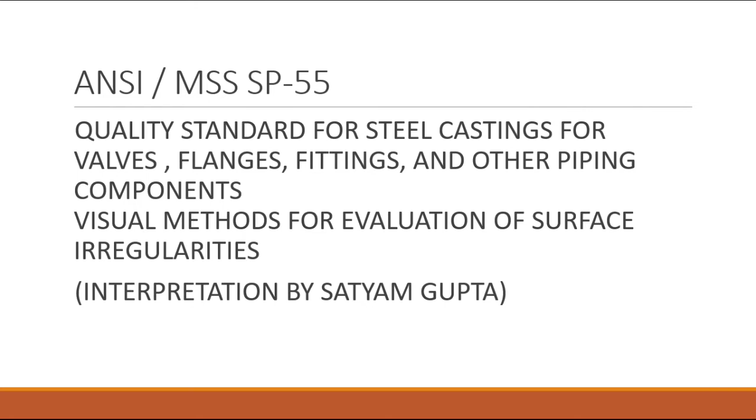Now I am moving to my technical topic, which is MSS SP 55 - ANSI MSS SP 55, quality standard for steel castings for valves, flanges, fittings and other piping components, visual methods for evaluation of surface irregularities. Interpretation by Satyam Gupta. Clause number 2.0: surface quality by visual inspection.

Clause number 2.1: 12 general types of surface irregularities are characterized in the collection, with 5 examples included for each type. The 2 examples shown on the left illustrate an acceptable degree of that particular type of irregularity. The 3 examples on the right are categorized as containing unacceptable defects. Clause number 2.2: the size of the plate is intended for general use for any 4-inch by 5-inch area.

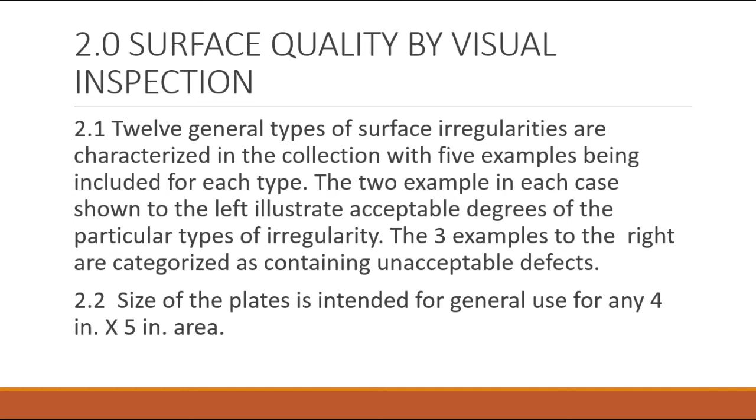Reference photographs, clause number 3.0. So friends, as I told you in clause 2.1, in MSS SP 55 for castings we have 12 different types of defects, and each defect type has 5 examples. Out of these 5 examples, we can accept the 2 examples shown on the left side, while the 3 examples shown on the right side cannot be accepted.

As per clause number 3.1, a set of 60 reference photographs illustrating various casting surface irregularities which can be observed by visual inspection is included herein. These photographs are actual-size examples of gradation involving acceptable and non-acceptable irregularities. It is intended that irregularities less pronounced than those shown as non-acceptable shall be accepted under this guide.

Clause number 5.0, comparison of MSS SP 55 acceptance criteria with CTI comparator covering surface texture quality standard. CTI is an institute called Castings Technology International, situated in Europe. This institute created SCRATA plates which are directly comparable with casting, and based on these Scatra plates we can accept or reject as per this specification. In further clauses you can see how we compare the Scatra plates with casting and how we accept or reject it.

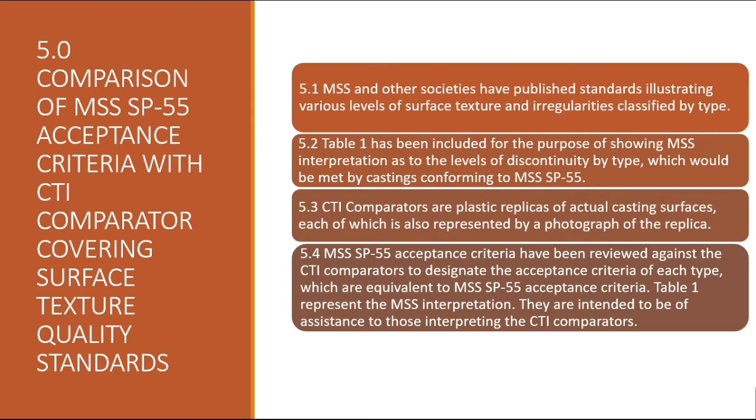Clause 5.4: MSS SP 55 acceptance criteria have been reviewed against the CTI comparator to designate the acceptance criteria of each type which are equivalent to MSS SP 55 acceptance criteria. Table 1 represents the MSS interpretation, intended as assistance to those interpreting the CTI comparator. This table shows the acceptance label in the CTI comparator considered equivalent to acceptance criteria of MSS SP 55. On the left side is the MSS SP 55 classification and on the right the CTI comparator equivalent.

Type 1 states hot tear and crack - none of the hot tear or crack defects can be acceptable based on CTI comparator or SCATRA. Type 2 defect is called shrinkage; there's no example, you can directly refer to MSS SP 55 which will be shown later. Type 3 is sand inclusion, where B2 or better is acceptable. Type 4 is gas porosity, where C2 or better can be acceptable.

Type 5 is veining, with no example - refer directly to MSS SP 55 for acceptance or rejection. Type 6 is rat tail, also no example; refer directly to MSS SP 55, example shown in the next slide. Type 7 is wrinkles, lap, fold, cold shut - D2 or better can be acceptable, the rest cannot be accepted.

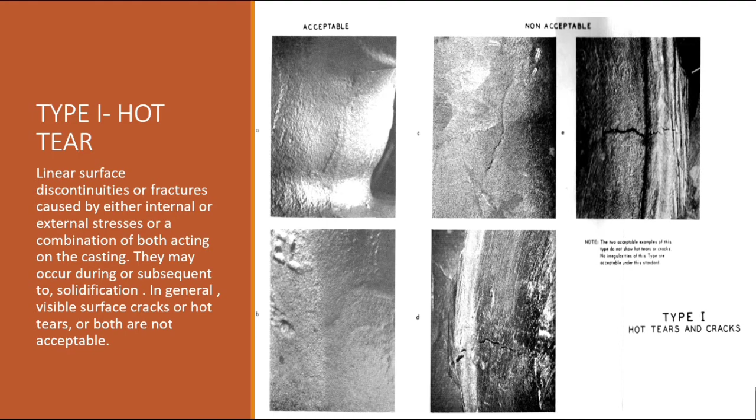In many cases, hot tear can also happen when there is thickness variation, because during solidification, the less thick section solidifies early and the higher thickness solidifies late. Due to this stress generation, this kind of discontinuity may happen. You can see what we can accept - acceptance A or B shows no evident lines of hot tear, so that can be accepted. But for C, D, E, you can see a crack line that is evident in C, evident in D, evident in E, and E cannot be acceptable.

Now, type 2, shrinkage. We know casting has a formula related to solidification, and during solidification metal has the property to solidify. If any void is left in the cast metal as a result of solidification shrinkage and the progressive freezing of the metal, it is exposed upon cutting of the riser and gates.

So you can see in A and B, in left 2, you can accept that. If you find such kind of thing in the casting, you can accept it. But in C, D and E, you can see evident bigger size of shrinkage or void. So friends, you can refer to these pictures, but for actual evaluation you have to buy the Scatra. You can see the actual filling on the plates - this is the exact replica of the defect casting. So you can compare that SCRATA plate with the casting, and accept or reject it. These photographs only give the idea for acceptance and rejection.

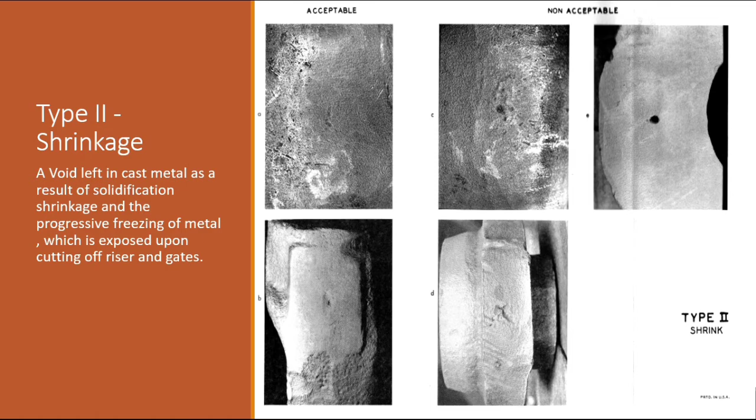Type 3, sand inclusion. During solidification, sometimes sand from the mold will break out and mix with the molten metal. So basically sand becomes entrapped in the molten metal and shows on the surface. In A and B, you can see minor sand, and that can be acceptable, but C, D and E you cannot accept.

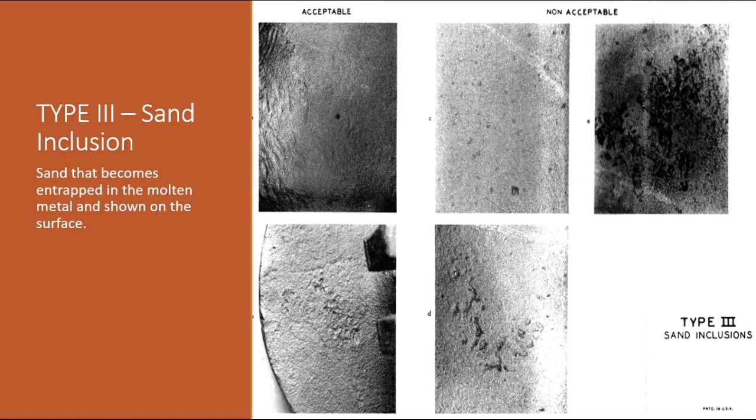Now I am moving to type 4, gas porosity. In gas porosity, there is void in the cast metal caused by entrapment of gas during solidification. So A and B you can accept, but C, D, E you cannot accept.

For gas porosity, I also want to focus on how gas and void porosity occurs. You know the formula for how water forms - water forms by hydrogen and oxygen. So during the molten or solidification process, if somehow hydrogen occurs from anywhere, and from the atmosphere oxygen comes in reaction, it forms H2O, and in high temperature that water will form vapor. That vapor is basically the main cause of gas porosity. So you need to protect your casting process from hydrogen and atmospheric oxygen - eliminate both elements so you can be free from gas porosity in the casting.

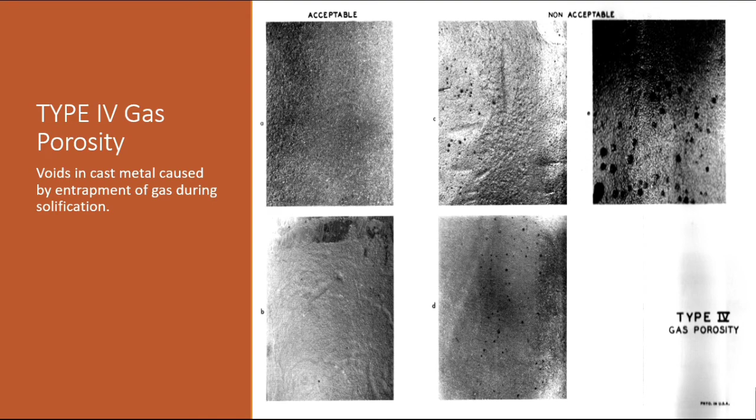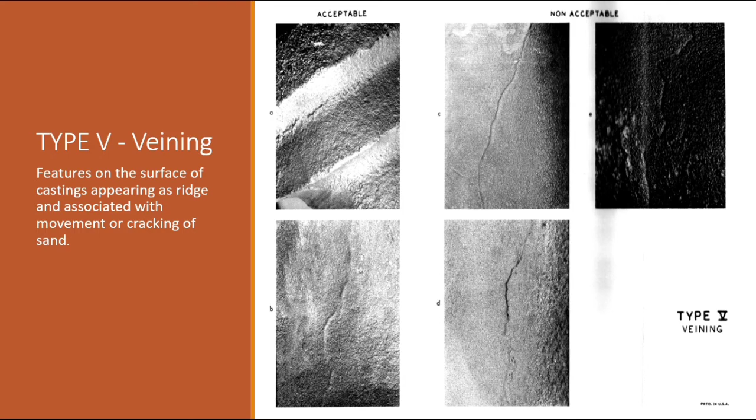Veining. Veining basically looks like a crack, but it's not an actual crack. It is a feature on the surface of the casting appearing as a ridge, associated with movement or cracking of the sand. If A and B kind of stuff you observe in the casting, you can accept that, but C, D, E you cannot accept.

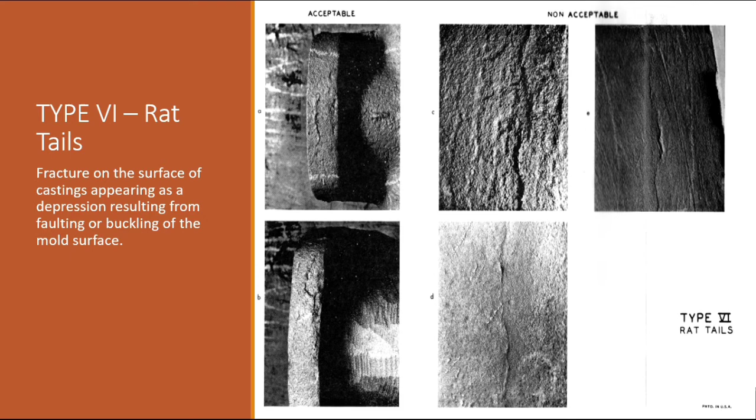Similarly, rat tail is basically a fracture on the surface of casting appearing as a depression, resulting from faulting or buckling of the mold surface. So you can accept A and B. On the right side, C, D, E, you cannot accept.

Cutting marks - irregularity in casting surface resulting from burning or mechanical means used in cleaning of the casting. So A and B you can accept, but C, D, E you cannot accept.

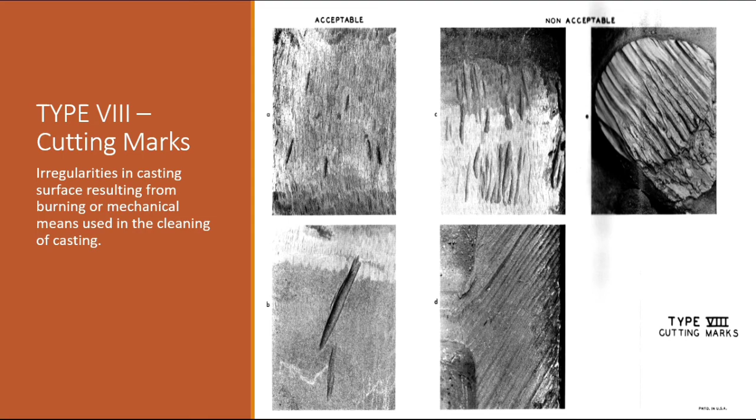Type 9, scabs - slightly raised surface blemishes that are usually sand crusted over by a thin porous layer of metal. So A and B you can accept, C, D, E kind of stuff you cannot accept. For this defect, if you have the SCRATA plate, you can get the feel of how it looks and feels, and based on that you can accept it.

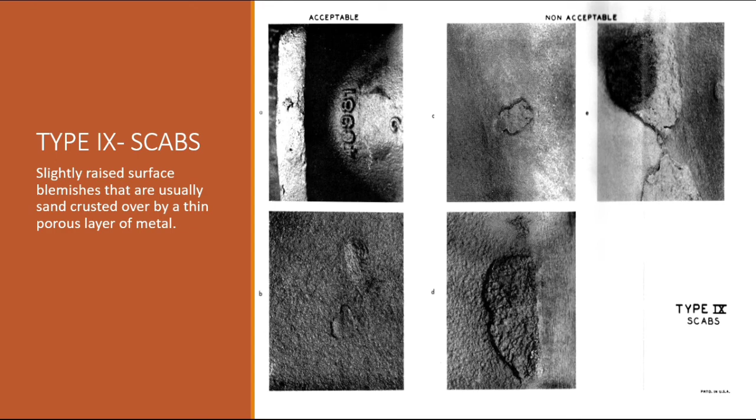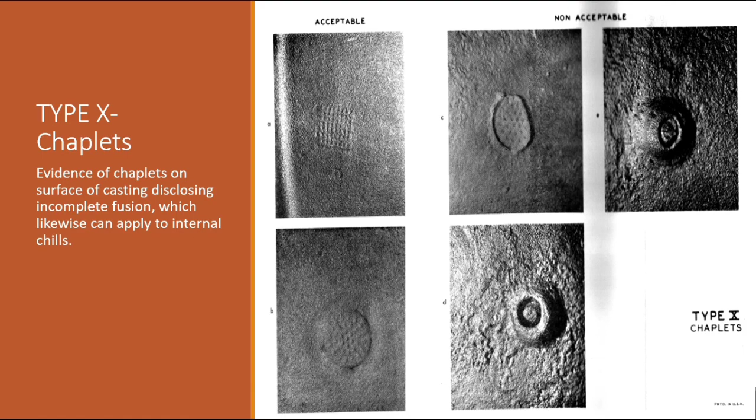Type 10, chaplets - evidence of chaplets on the surface of casting disclosing incomplete fusion, which likewise can apply to internal chills. So A and B you can accept, but C, D, E you cannot accept.

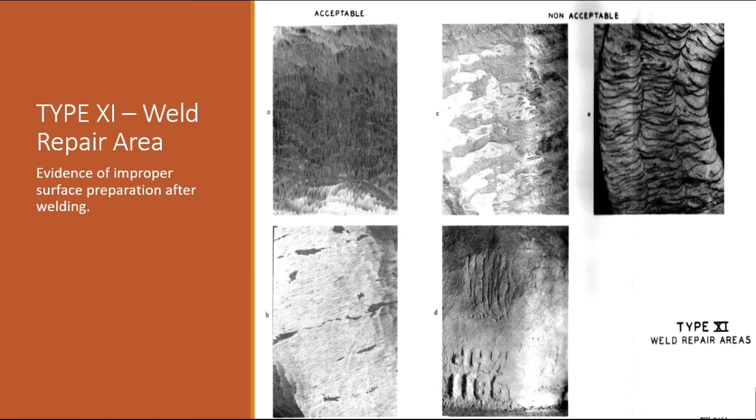Type 11, weld repair area - evidence of improper surface preparation after welding, no proper grinding over the welding. So A and B you can accept, but C, D, E kind of stuff you cannot accept.

So friends, I am trying to provide you information about MSS SP55 in this lecture, and I hope you understand and learn. I will try in my next classes to explain more about casting defects. Due to lack of time today, I will explain in more detail in the next few lectures, so you can understand better about the casting defects.